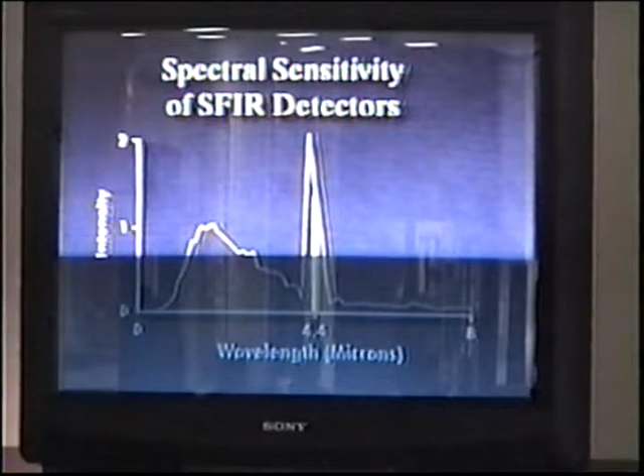Single-frequency IR detectors are useful in many areas where UV detection is not appropriate. They use a patented, narrow bandpass optical filter sensitive to radiation in the 4.4 micron range, an important wavelength for hydrocarbon fire emissions. They also use a flicker frequency to distinguish between hot body radiation and actual fires. Typical response times are around 3 seconds.

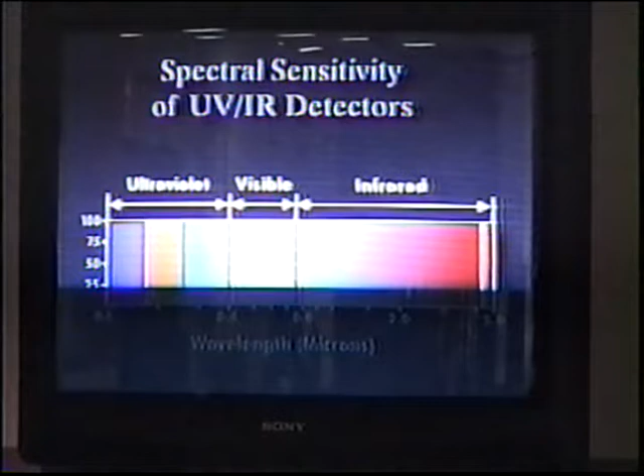UV-IR detectors consist of an ultraviolet and an infrared sensor paired together. The UV-IR detector is very resistant to false alarms because both UV and IR sensors must respond before an alarm is given. While both UV and IR detectors have false alarm sources, they have virtually none in common. Typical response times are between 1 and 5 seconds.

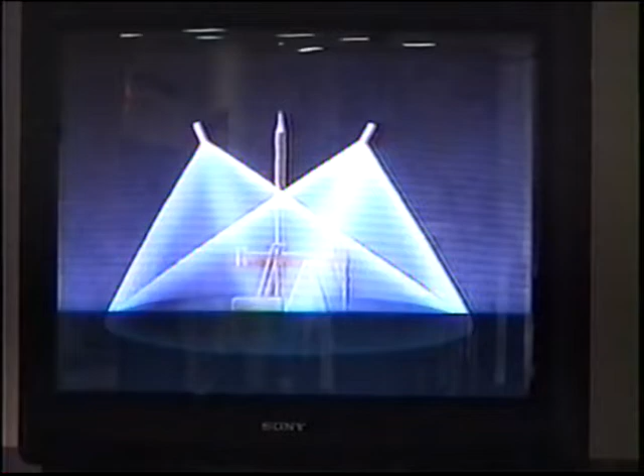All of the detectors have a cone of vision of approximately 90 degrees. Since the detectors will not see fires outside of this cone, careful aiming of them allows a friendly fire, such as a flare stack at a refinery, to be present in the area without triggering an alarm. However, mounting detectors in the corners of a room at 45-degree angles makes it possible to provide thorough coverage of everything in the area.

The first fire test will demonstrate speed of response to a 1 square foot gasoline fire at 40 feet. In applications with very hazardous materials, speed of response can be the most important factor in choosing a flame detector. The UV detector responds fastest because it only requires the fire to reach a certain intensity before sounding an alarm.

Although the vast majority of fires are hydrocarbon fires, some applications have unusual fuels. In those cases, the ability to see non-hydrocarbon fires is important. An example is a hydrogen fire at 40 feet.

The UV detectors saw the hydrogen fire while the others did not. This is because non-hydrocarbon fires, such as hydrogen, ammonia, titanium, and magnesium, do not emit radiation in the 4.4 micron range required by the IR and UV-IR detector.

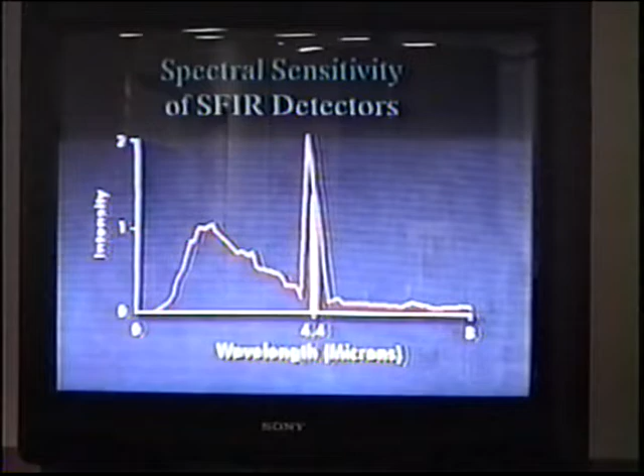The next fire will be a methane plume fire, as defined in standard 3260 by Factory Mutual, observed at 40 feet. All detectors responded well to the fire.

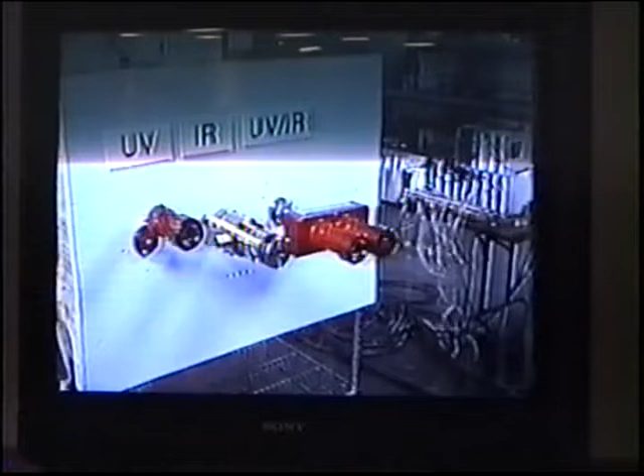Unlike the plume fire, some fires from gas leaks are under high pressure and can be quite large. A major gas company conducted high-pressure gas fire tests on Det-Tronics flame detectors. These tests were representative of risks found in industrial applications. The flames produced in these tests are readily detected by Det-Tronics UV, IR, and UV-IR detectors.

The ability to reject false alarms is an important criteria for a flame detector. A common false alarm source in industrial applications is arc welding, here observed at 40 feet. The UV detector has responded to the arc welding, while the others responded only to the fire.

Arc welding is an intense emitter of UV radiation, but does not emit in the 4.4 micron range. Therefore, the IR and UV-IR detectors do not respond. The ability to ignore arc welding while responding to the fire it can cause is an important capability of Det-Tronics UV-IR and IR detectors. Welding is a high fire risk activity. In America, between 1981 and 1985, welding caused over 3,000 fires each year, causing damage of almost $40 million each year.

Flickering hot body radiation is another common false alarm source. Common sources of this radiation include hot engines, manifolds, or lights, interrupted by moving machinery or people. The single-frequency IR detector has responded to the flickering hot body radiation at a distance of 30 feet. The UV and UV-IR detectors do not, because hot body radiation does not affect UV detectors.

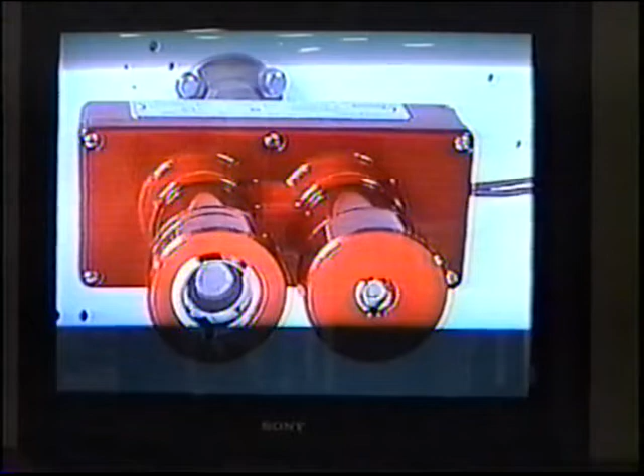The UV-IR detector resists false alarms and has a good detection range. It will see fire even in the presence of welding. Good applications for UV-IR detectors include aircraft hangars, transport loading racks, and compressor stations.

There is no perfect fire detector. Each has strengths and limitations that make them appropriate in some areas and less appropriate in others.

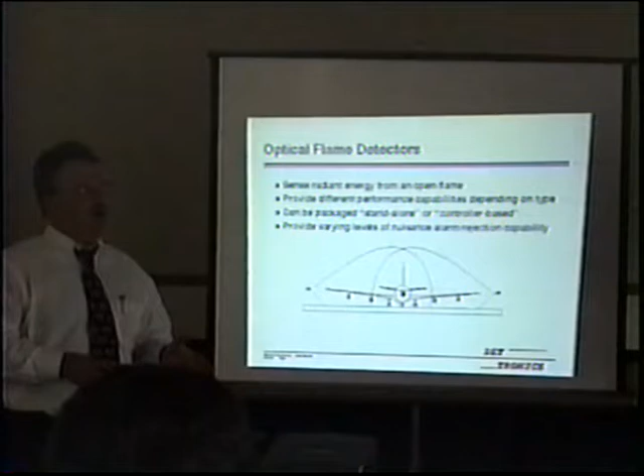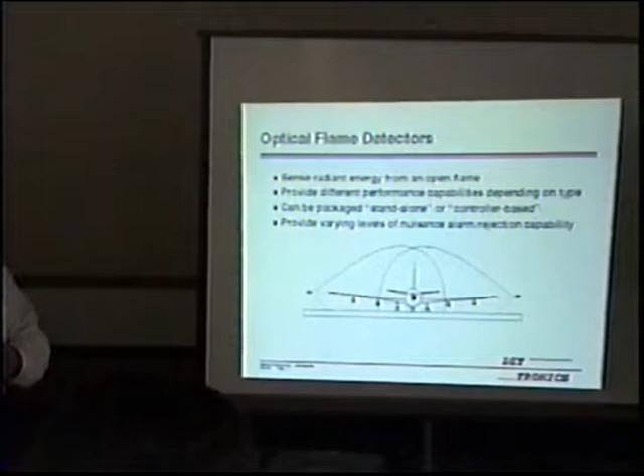When we look at optical flame detectors, we're looking for the visible, ultraviolet, or infrared energy coming from the fire. If the fire was smoldering, we wouldn't be able to see it because it's not giving off the right properties. So we're actually looking for the energy level to be at a required level after the flames have grown from the product.

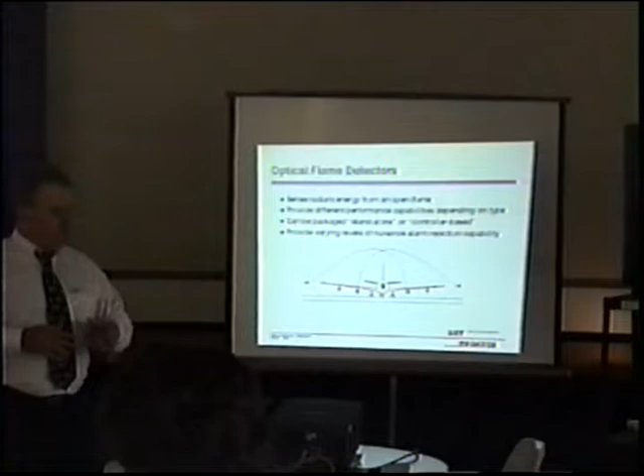If we look at this application here, you're looking at a plane. We have optical flame detectors looking from either side, and they can be looking from the front. We have systems designed to act as one controllable system, or unitized products that can be tied into any existing fire panel, giving you a lot of flexibility.

When we look at a flame detector, one of the key items is the cone of vision—where does the detector actually see, and how do you use that to cover a complete area? A typical cone of vision is 90 degrees, and Factory Mutual tells us that typically, or at minimum, 50% of the central axis is where your cone of vision at 45 degrees off angle is drawn.

We've made some changes recently with the new product, and we could actually push that up to 75% of the detection range, giving you more coverage per detector. This allows you to zone detectors and cover areas where you may be forced to rely on a single detector. We'll be showing detectors today on axis, but the response can be figured at 50% for some, 75% on a single product.

One of the key features in optical flame detectors is that it has to know it can see a fire. Detector Electronics was the innovator of optical integrity—basically an optical check on the detector. This is incorporated in all our detectors.

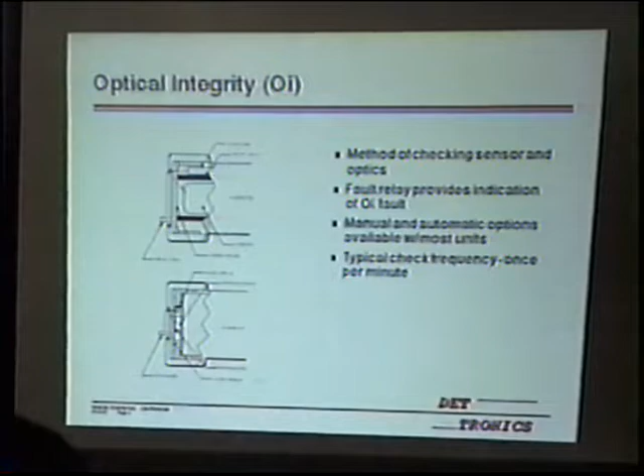We have a UV source that is bounced off a reflector through the window, back through the window to the detector. That verifies that the detector is capable of seeing a fire, or if it's been contaminated and no longer able to see a fire, it'll give you a fault telling you to clean it or service it. This allows you to rely on your detector being in service out there in the outdoor environment.

We have an infrared detector that also incorporates a very similar check, except now we have an infrared source that comes off a reflector back to the sensor. In both these optical check methods, we're looking for the radiation in the wavelength that the detector is looking at—verifying the window's clean, and verifying that the detector is capable of responding to radiation in the proper wavelength. Very reliable.

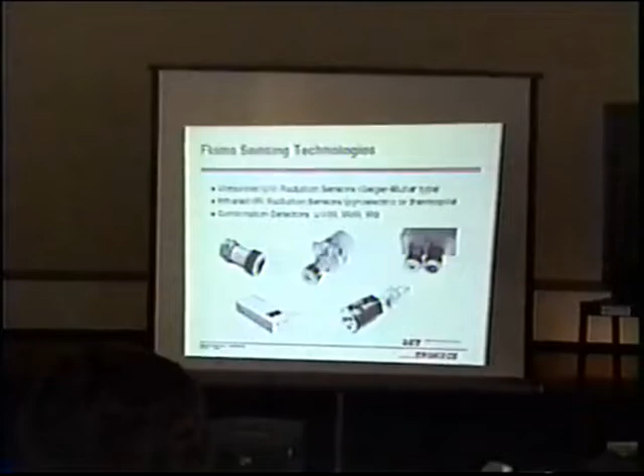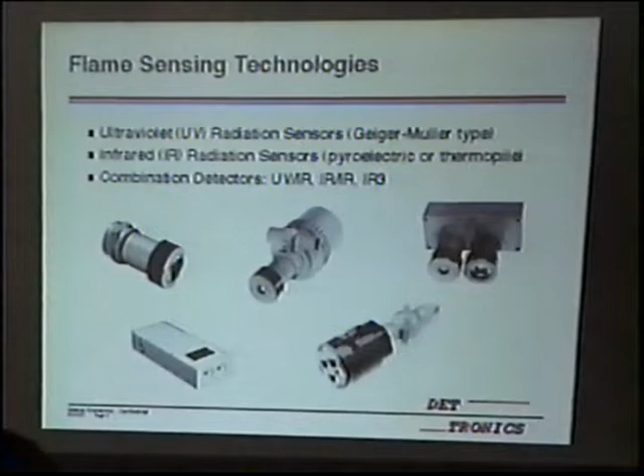We look at the different technologies. We really started with Detector Electronics ultraviolet detectors. They were very good, general duty, but we found there's a lot of areas where there's welding, a lot of areas where there's radiation, people looking at the integrity of pipelines doing a lot of X-ray. And UV detectors are very good at telling you when you're doing that.

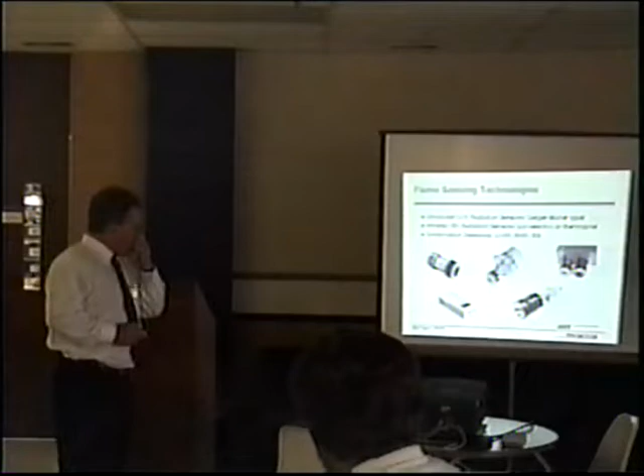So we incorporated an infrared sensor with it, and we also built a single frequency infrared standalone for use in very dirty areas. Since then, we have added a dual spectrum, which is a dual wavelength detector looking at two different wavelengths. And this is our new multi-spectrum IR detector, which gives us an advantage for long range and also high false alarm immunity.

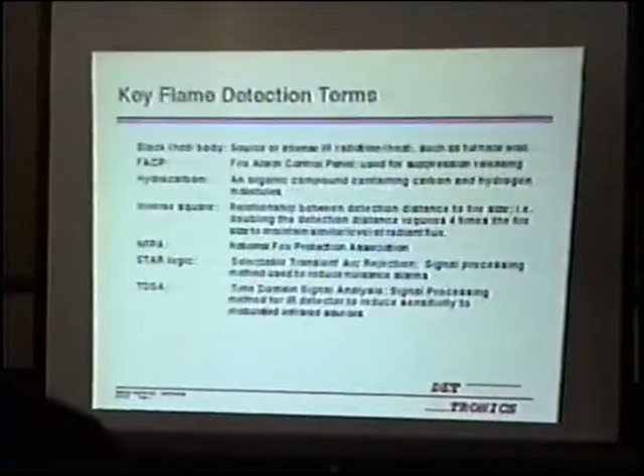We look at just a few concepts we're going to be showing today: the black body, which was the heater you saw in the video, something that is normally in an environment, and we'll see what effect that has on flame detectors.

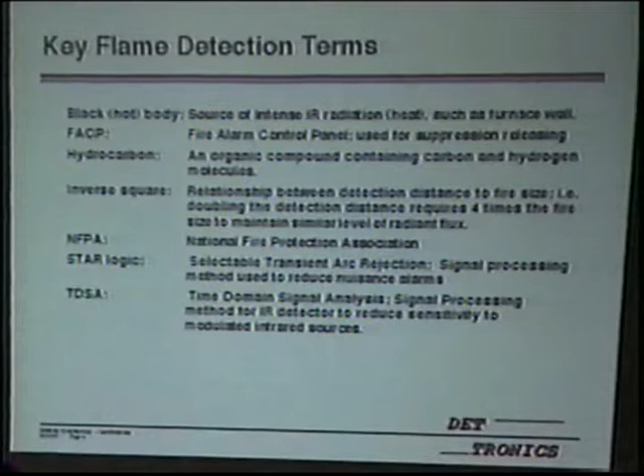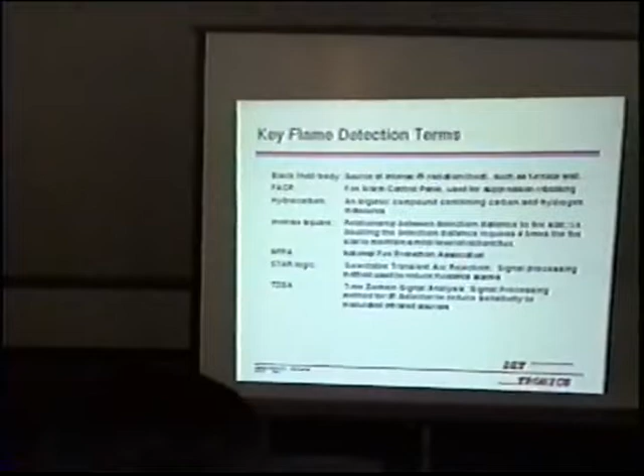The other key item here is that flame detectors are governed by the inverse square law, which basically says to double your distance, you have to have your fire size grow by 4 times. So when you look at the detection range of a product, you have to look at what size fire you can live with and size the detector to the distance to the fire size, so that you don't rely on a 10-foot fire in a 20-foot building. The flame detector is going to be able to see it, but you may not be able to save anything once that happens.

We're going to be showing StarLogic, which is a selectable transient arc rejection, used on our UV and UVIR detectors, and also a patented TDSA, time domain signal analysis. This allows an IR detector to respond to fires very fast, but reject regularly modulated IR, which normally would cause a false alarm in that type of technology.

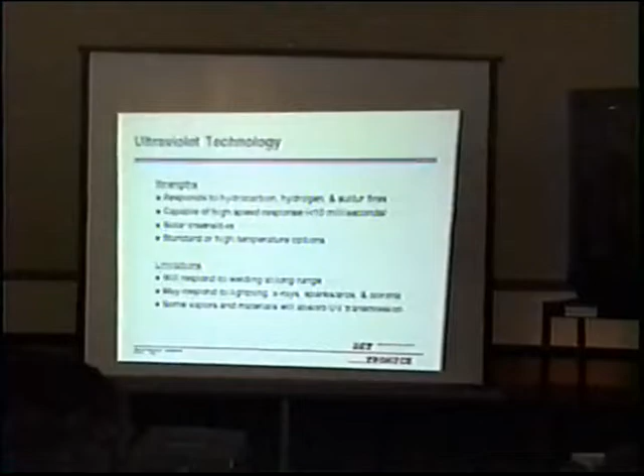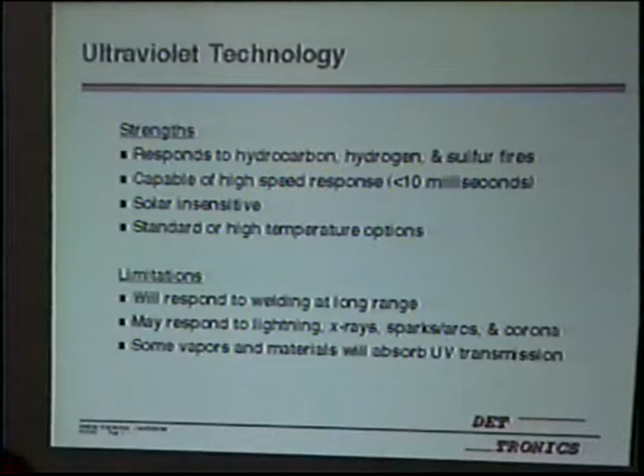We look at the ultraviolet detector. Great, it's general duty - it can basically see every kind of fire you can do. It can be very, very fast. It's solar insensitive. Limitations, as we said, welding is very, very bad. Think of a guy working on a pipe a mile away - if that detector is in that direction, it could detect that welding a mile away, and that could cause a false alarm from a facility where you don't realize they're welding.

The other item is X-raying, and X-raying is hard to control because a lot of people think the wall's going to stop it. We have compressor modules up in Alaska where they're X-raying the pipes, and all the detectors go off inside - can't figure out why. So what we've done is gone with different technologies to handle problems that UV can't overcome.

When we look at single frequency infrared detection, it is very strong because it can run in a very dirty environment. It doesn't need a lot of maintenance. If there's oils present, it's basically invisible for an IR detector.

IR detection is basically blind to arc welding unless you get very, very close. We look at a detection range for someone arc welding at about 15 feet when the detector is set at its highest sensitivity, as compared to a UV detector at a mile or more - it's fairly insensitive to it. We do offer a high-speed version for special applications such as high-pressure gas lines, but there are some limitations with IR.

As we saw in the video, we look at 4.4 as our peak wavelength on IR. Non-carbonaceous or non-hydrocarbon fires cannot be detected by that because they don't exhibit any kind of radiation in that area. So we have to really stick with your petroleum products. It will not be able to detect something like silane. It will not be able to detect hydrogen. So you have to know what you're going to detect and then fit the right detector to it.

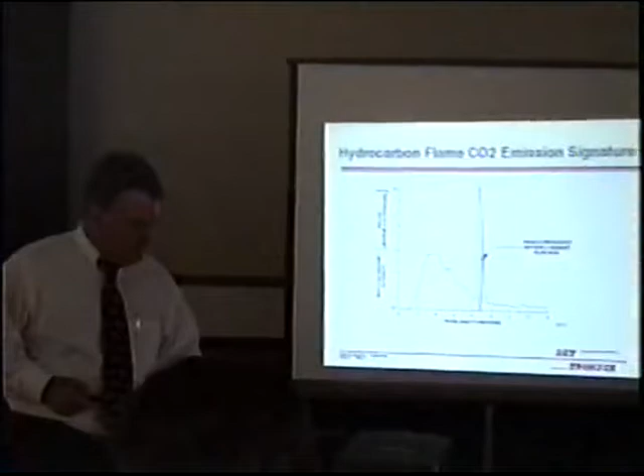We look at the IR, and this is true for the UV IRs and single frequency IRs. We're looking at this very narrow 4.4 band, and this is actually a curve of a fire. A fire will exhibit in the water band about 2.5, and the signal will be absorbed by the environment. We get this other clear window, and we use this little sliver here because of the solar insensitivity for the IR in that range. But it also gives us a lot more area to work with, a lot more signal, allowing us to get very good range and reliable detection.

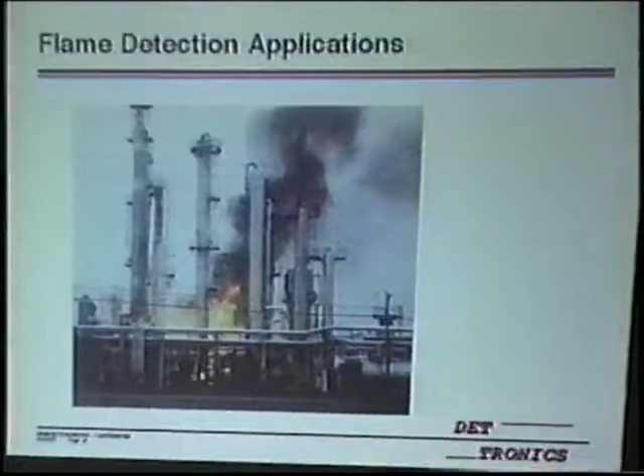When we look at an application here, this is a refinery obviously engulfed in fire. This is what we want to basically stop before it gets that big. Our flame detectors are gauged by what Factory Mutual 3260 tests them to. We look at a 1 square foot gasoline fire or a 30-inch methane plume and other fuel 1 square foot fires as our test fires. And I can tell you there's not a product in the marketplace that can detect fire faster, more reliably, and give you the false alarm immunity that we're going to show you today.

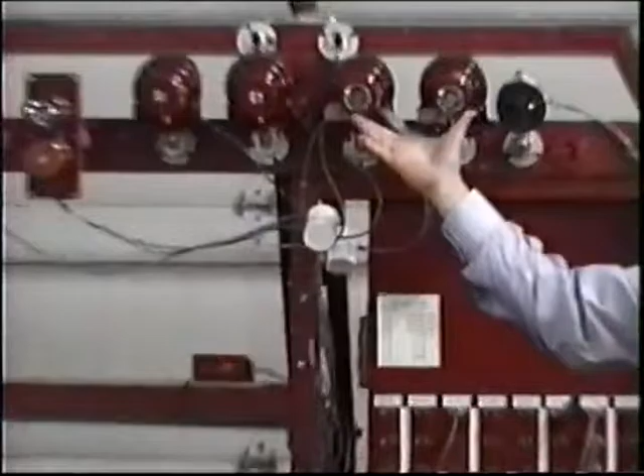We have 2 UV detectors. This happens to be our 7602E. They all have difficult numerical names to remember. The reason there are 2 here is that one incorporates the STAR logic we saw in the video, an advanced signal processing algorithm, and one does not. We'll be able to show you the difference in performance that allows us to achieve with both detectors here.

Here we have the U7698E, a single wavelength infrared detector. These have but one IR detector per device, looking at the 4.4 micron region we showed in the presentation earlier. Again, there are 2, because we're going to show the difference between the standard signal processing algorithm, which looks for the occurrence of flicker and level of intensity, and the TDSA, time domain signal analysis program, which allows us greater signal processing and greater distinctions between fire and non-fire sources of infrared radiation.

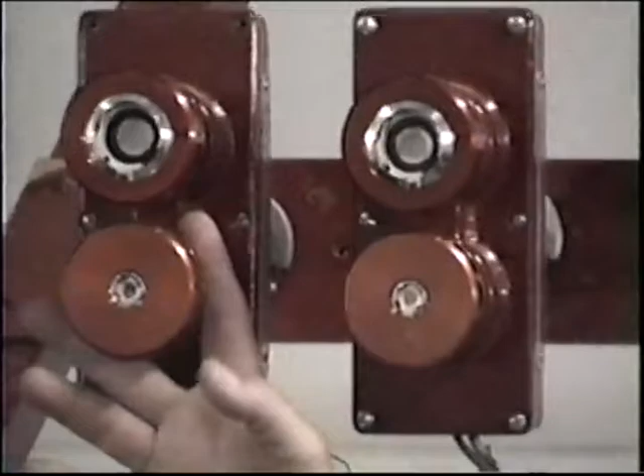Last but by no means least, we have 2 samples of our UV-IR detectors. This happens to be a unitized device, the 7652, whereas this is a controller-based device. The reason there are 2 of these devices here is primarily so I can demonstrate the ability of the detectors with controller-based connections.

I can take and look at the individual signal strengths in the IR and UV detectors, and that will allow us to compare the UV and IR outputs of various fuels. Because another thing we'll see tonight is that a fire is not just a fire - just as it makes a difference in how you site sprinklers, the fire hazard itself also makes a difference in what kind of performance you can expect from your optical flame detectors.

So that's the cast of characters. The whole thing is, as you saw in the video, connected up to our data acquisition system, which is operated by Jeff. Each device is monitored by the data acquisition system, and the alarm relay is polled every tenth of a second. We can go faster than that, but tonight's demonstration will be looking at every tenth of a second.

We also have the detector down at the far end of the building, right next to the fire pan, that we call our time zero detector. That provides us with an automatic means of determining the point of ignition. We've got that set at a very high sensitivity level, and being right up against the fire, it produces a response time of about 50 milliseconds, giving us an automatic indication of the point of ignition. We can wander over here and take a better look at how this all works.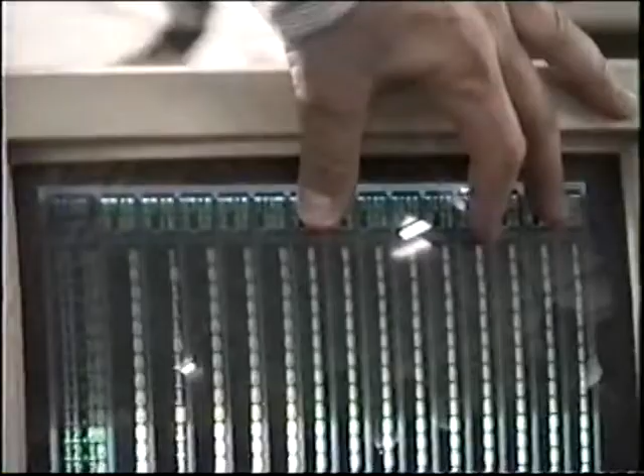As you can see, the acquisition system runs on an independent time base, scrolling by, and our sample time is every tenth of a second. The green characters here are hash marks - each column is the detection system in question.

And when that goes from a hash mark to a dot - Jeff, can you give time zero some radiation there and demonstrate that - that indicates an alarm. Notice over here we start to see numbers popping up in the yellow column, and that's the count per second.

The UV and IR detectors that we're monitoring the individual signal strengths from produce a frequency output proportional to the intensity of the radiation being received, and that is in a unit we call counts per second. So it's a number of pulses received in a unit amount of time, and that gives us an indication of the amount of signal strength we have either in the UV or the IR bands.

So when we do a response time determination, the point at which the time zero detector trips is compared to the point at which each of the detectors under test indicate their alarm, and the net difference is then the response time. We also have the ability to go in and take a look at the signal level at any point in time in the UV and IR bands.

You'll notice that our IR detector produces a constant level of output that's used to verify on a routine basis - it's an electronic zero, and the presence of that indicates to the controller that the detector is in fact there. Of course, it does not accomplish the through-the-lens check that the OI system does. It's kind of a belt and suspenders approach there.

Yep, I'm about ready to get to that. Because not everybody can watch that, we have every system under test today on the annunciation panel board. You'll see them labeled by model type and also by technology. So going from the left side top, you've got the 7409 UVIR, that's that controller-based system I showed you.

UV system without star, next down the UV system with star logic. The 7698E single wavelength infrared detector operating without TDSA. The single wavelength IR detector operating with TDSA. Moving into the next column, we have the U7652 UVIR detector. It's the unitized package, the X3300 multi-wavelength IR detector.

And last but not least, the PM6M dual wavelength detector. To the left of each one of those detector blocks is a red light that will come on indicating when the system is in alarm.

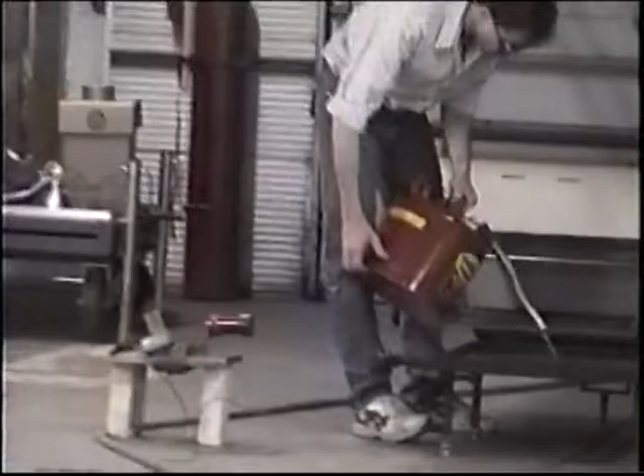Have the detection systems positioned at a distance of approximately 100 feet from the fire. This is a size of fire, type of fire, and range that all the detection systems in question should be able to react to. I thought that would be a good place to start.

Everybody ready? Stand, please.

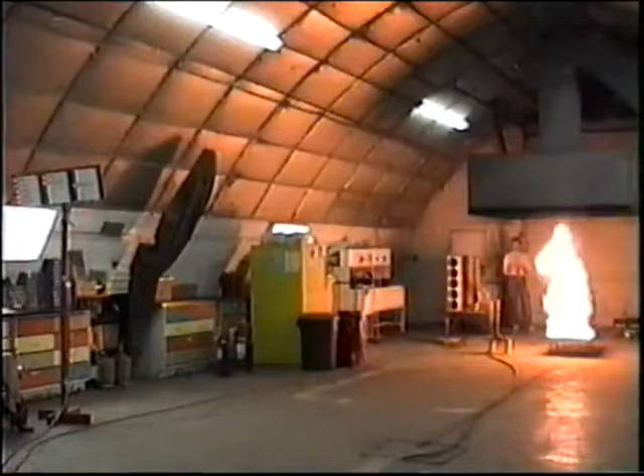Power of that fire - you can actually feel the radiant energy on your face. Quite an intense fire, and I will ask Jeff to put it out before it gets carried away with itself. Do not try this at home.

Board lit up like a Christmas tree here. It does do that. We'll get to individual response times here.

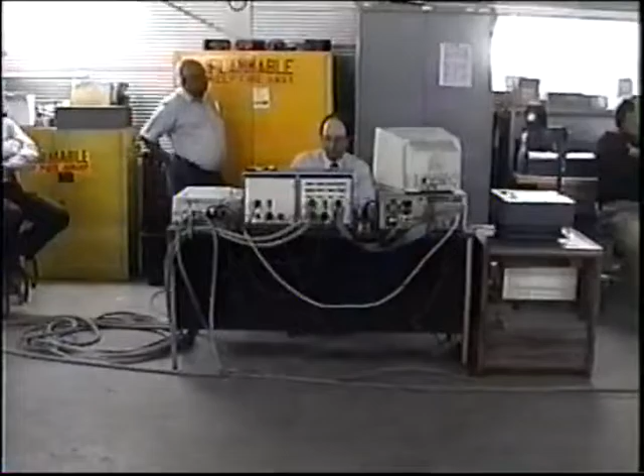Well, that 2 foot by 2 foot fire would be a typical hangar fire size that they would typically test for at 100 feet. When you go out to 150 feet, their test fires have been up to 10 by 10, or 100 square feet - very huge fires that Rob got to have fun with.

We could do that fire here, that's just regular gas. But we have the ability - all those detectors are actually set for 3 by 3, so much smaller fire than is actually specified for, and that gives us the reliability. You know you're going to be able to detect it when you need it.

Okay, bright light warning to those of you standing close. This is pretty typical of what you might see here from the detectors in question. You see that we had alarms ranging anywhere from under a second to just over 10 seconds.

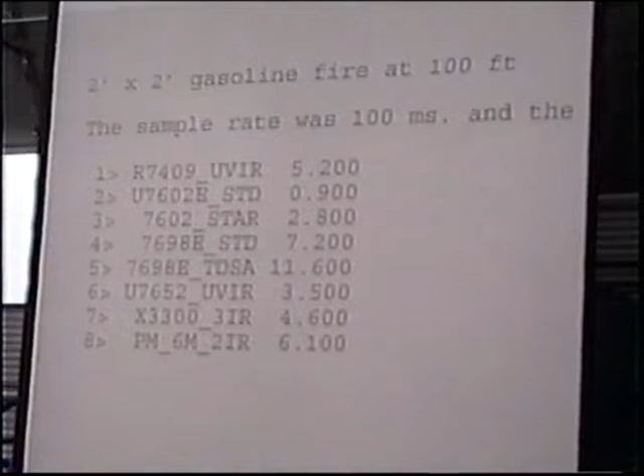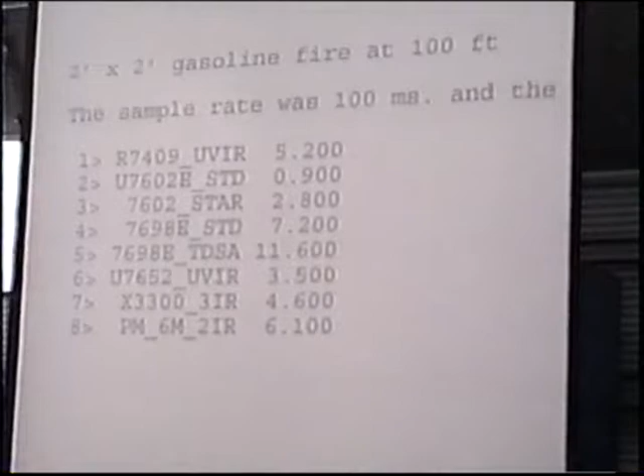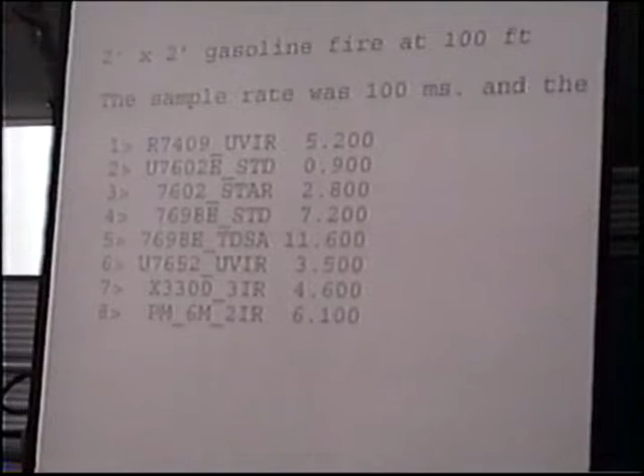Our UVIR system operated in 5.2 seconds. UV systems, depending on their sensitivity level and whether they use the star logic or not, 0.9 to 2.8 seconds. The single wavelength IR, 7.2 to 11.6 seconds. Again, this unitized UVIR went in 3.5 seconds, the X3300 in 4.6 seconds, and the PM6M in 6.1 seconds.

You might wonder why some of these detection systems took as long as they did to react, and it has to do with the fact that this is their rated maximum detection distance. Also, even though to our eye it appears that this fire develops virtually instantaneously, it actually takes a certain amount of time for the fire to come to an equilibrium condition and reach its peak size.

And I can illustrate that by taking a look at the count per second data that we get from the fire. To do that, I have to go back into the data file, determine when the start of the fire was, and I'll take a look at the first 5 seconds and then 10 seconds later.

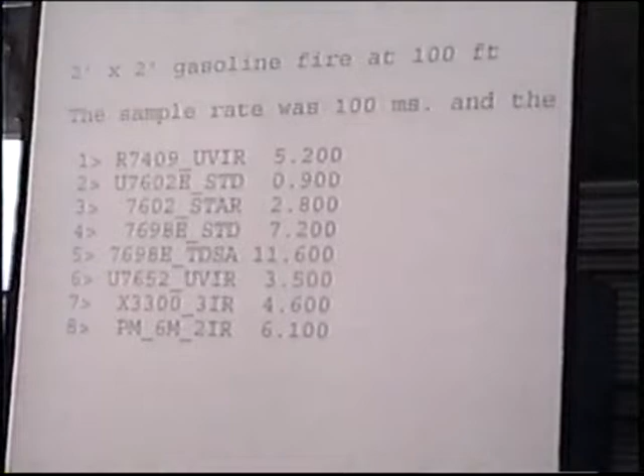Keystrokes, Rob. Well, you know, sometimes there's an operator error from time to time. I won't try to hide that.

Okay, so here's the UV and IR outputs we're monitoring from the detectors in that first 5 seconds of the fire. And while that's coming up, I'll prepare...

Sample, seconds later. So our next fire is going to be a 1x1 gasoline at the same range. You'll see a difference in response.

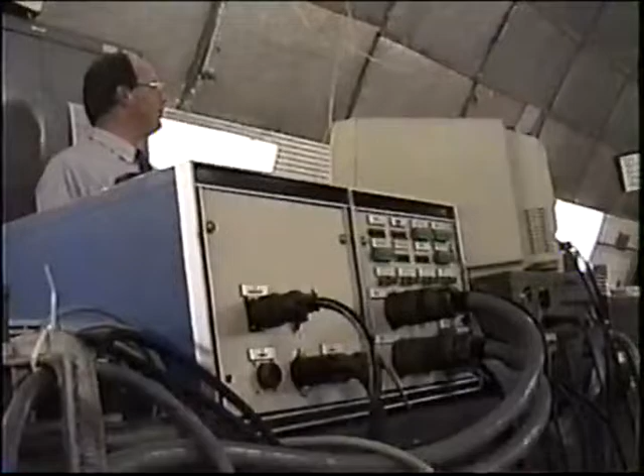We'll refer back to these test results now that we're going to go to a fire that's 4 times smaller, a 1-square foot gasoline fire. Each time we burn a gasoline fire, it's important to recognize that gasoline is not a pure compound - it's a mixture of compounds, some quite volatile, some less volatile. We start with new fuel each time because, again, what's the actual hazard - isn't it going to be fresh gasoline, or heated gasoline? You can play games with this, but it's important to be aware of the issues so you're not fooled into thinking performance is what it may not actually be.

We'll do the test the very same way, and I believe everybody's ready.

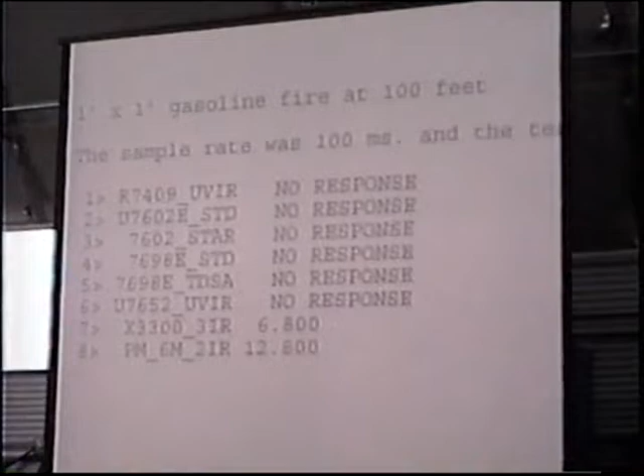The 6M and the X3300 are the only detectors rated to see this fire at this distance. Even though it may be obvious, there can be confusion - people may think that because a detector didn't see this fire, the 7602E, for example, can't see a gasoline fire. That's not really true. It either has to be bigger or you have to be closer. There was not enough signal level - the criteria was not met in order to generate an alarm.

Let's just compare here, we'll put it up here. These are hard to read when you've just got transparencies. Now here is the count per second output level of the UV and IR detectors, and a lot lower, especially in the UV detector area. You can see basically pretty close to zero.

That was compared to our 25 counts per second that we had before. Notice that in that first burst of ignition, the IR detector did get some output, but again, it was not anywhere near adequate to generate an alarm. Even if it had been, its UV partner was not up to its output level, which is expected as a typical 25 counts per second - a very typical field setting.

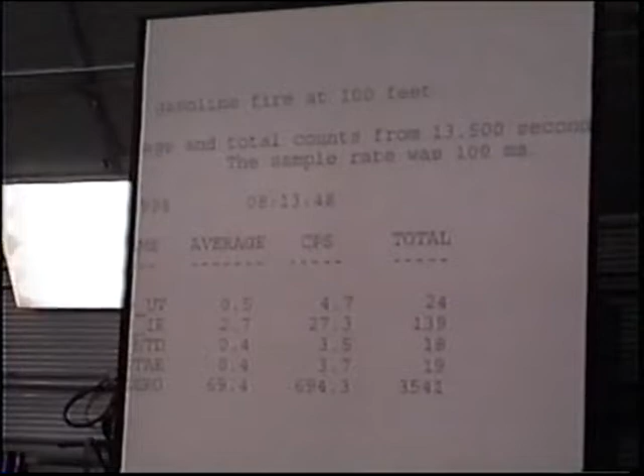As we saw before, there is some increase over time with this fire, but not as much. That can be understood in terms of the fact that there's not as much fuel to heat, and a smaller fire tends to reach equilibrium faster than a larger fire of the same fuel type.

One other thing to notice here is what we call the saturation output level of the UV detector. The UV detector can't really put out much more than 800 to 1,000 counts per second, regardless of the intensity of the UV radiation it's receiving. You'll notice the time zero detector is operating quite near that, being only about a foot from the fire.

If at any point there's any questions or any additional interest, please stop me, interrupt me. This is, I've seen this before, so.

Hey, Rob? Yeah. With the gasoline here now, do you test with different types? Like if you use unleaded versus aviation fuel, and do you see a difference with your detectors?

We do indeed. In fact, when leaded gasoline became virtually unavailable some years ago and unleaded became the standard, we had to do a little research as to whether or not there was a difference, and there was a slight difference. That meant we had to reestablish control limits and so forth for our production tests.

It caused us a little bit of grief, but you might notice all the flammable storage lockers around here - it's virtually a cocktail cabinet full of different flammable liquids and materials, because each flammable material, even though they may be of a similar category, will have its own characteristics.

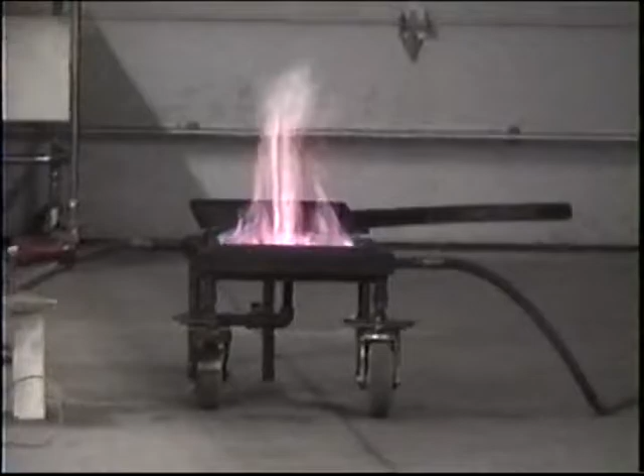This would be a fire typical of, say, an oil platform where they use methanol as a drying agent, or in other processes where they use methanol as a washing agent.

So this came in as you said, at maximum rate of rise. We'll just let this sit here. You can see it never really gets any greater than this, and this is what I would call an equilibrium point.

When you look at this type of fire, the methanol fire, you'll notice, like the PM6, this is out of range of that product, and it will not detect this no matter how long you wait. The fire would have to be bigger. You can't think of it as just a time limit where you can wait longer. If that fire is never going to get any bigger, the detector will never see it.

Well, I think we've waited long enough to illustrate that point.

A question came up: how come the PM6 isn't detecting this fire? This type of fire, when it's detected at 1 foot by 1 foot at 50 feet, is out of range. Yes, it's beyond its detection range for this particular hazard because it's not the same kind of fire. We'll give you some quantitative data here momentarily.

So we look at different applications, there's different fuels. This makes it very hard when you talk about a solvent storage area—you may have a mixture of all these different fuels, and you need to select which is going to be the hardest to detect, and base your design off of that lower burning, lower volatile fuel as your hardest to detect, causing your detectors to move in accordingly.

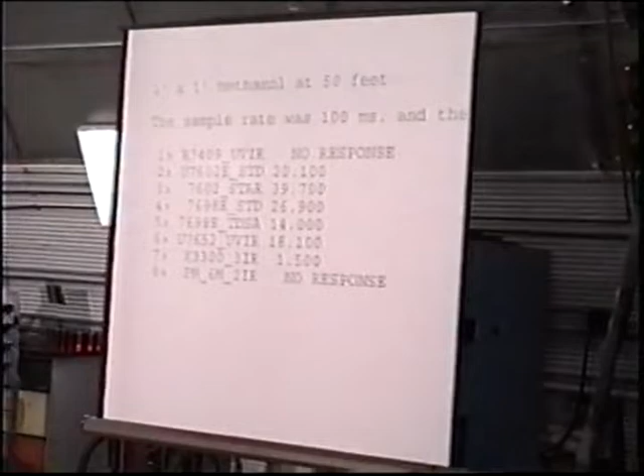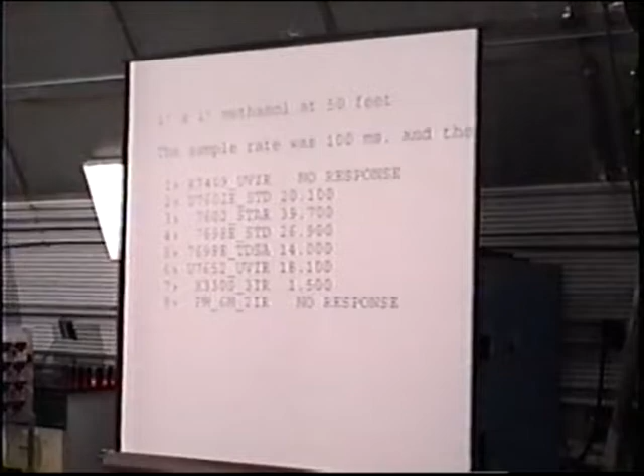Notice the X3300 first to respond—of course, being a very sensitive device, one can expect that. Our UVIRs and the single wavelength IR detectors are right just beyond their sensitivity, beyond their detection range, the sensitivity levels that we have them set, or in the case of the fixed sensitivity devices. So what I'm trying to say is it's not that they can't respond to this methanol fire, but they need to be another 10 feet closer, and they would work just fine.

I talked earlier about how we use the count per second data to look at the differences in fuels. We've talked a little bit about that already. I've taken 2 snapshots of the output here.

In the first 5 seconds of the fire, very little UV, pretty low levels of IR. A few seconds later, the UV has grown a little bit, but not really to the alarm point yet. And if I go to the very end of the fire, finally we did get some alarms in the UV, somewhere in the 25-second range.

Let's just compare the methanol data to that of the gasoline data. We won't be able to compare absolutes until we run the gasoline at this distance, I guess. So that will be next, right? Gasoline next? Getting ahead of myself.

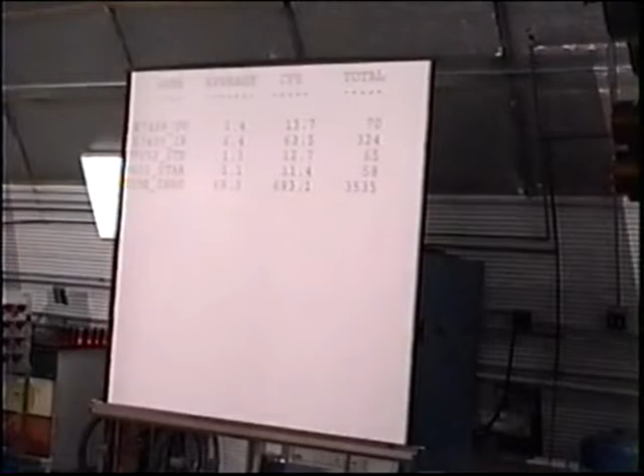Okay, now just to compare apples to apples, here's gasoline—first 5 seconds of the fire. I should have looked for the first 5 seconds. There's methanol at the equilibrium point. There's gasoline at the equilibrium point.

So the top one is gasoline, the bottom one is methanol. The point you can see qualitatively with your own eyes is that there seems to be a lot more radiant energy coming off that gasoline fire, the block of data at the top, than off the methanol fire, block of data at the bottom. And again, that's absolutely true. Notice the proportion of UV to IR energy is really not that terribly different. They both have similar amounts.

We noticed that the UV detection with the star logic, which requires a steady level of output at that 25 counts per second range, took a long time to alarm, and one can now understand why, because even averaged over a long period of time it was only about 20 counts per second. In fact, there must have been a momentary surge in the UV, as we saw the flickering. We talked about the oscillation that occurs around the peak output level once equilibrium is reached, and that did allow it to be triggered.

So this kind of data allows us to tell the customer, for example, they may say, well, I want to see a square foot of gasoline, but I can't get the detectors any closer than 50 feet away. What can I do about that? Well, we have a couple of choices for you. We know we can switch technologies, the X3300, PM6M, or we could run at a higher level of sensitivity. We know what the trade-offs are there. If those trade-offs are acceptable, we'd be able to provide not only qualitative advice, but quantitative advice.

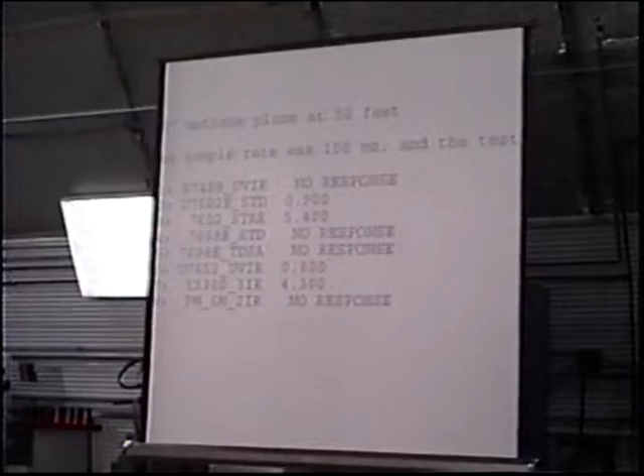In this particular case here, we see just what we'd expect. Most of the systems are beyond their sensitivity limit for this size fire at this distance. But we have a response from the X3300 in 4.3 seconds. As you've seen with this device, it really never responds any quicker than 3 seconds, and that's inherent to its signal processing algorithm. It does a lot of advanced calculations to distinguish fires from non-fire sources of radiation, requiring a sample of data in duration of about 3 to 6 seconds to make that determination. So it's inherently a slower responding device, but that's usually acceptable in situations where a high level of false alarm rejection is required.

The unitized UV/IR didn't manage to respond until 0.8 seconds—you might have noticed it was kind of toggling in and out. The only other detector that gave us a good, solid response was the UV detector. And again, we see that there was some difference between the star logic and the standard version of the device.

The reason for that is just right at that point where we're just below the alarm threshold, so we're waiting for an occasional excursion in a higher intensity direction to get the UV detector to indicate alarm at this distance.

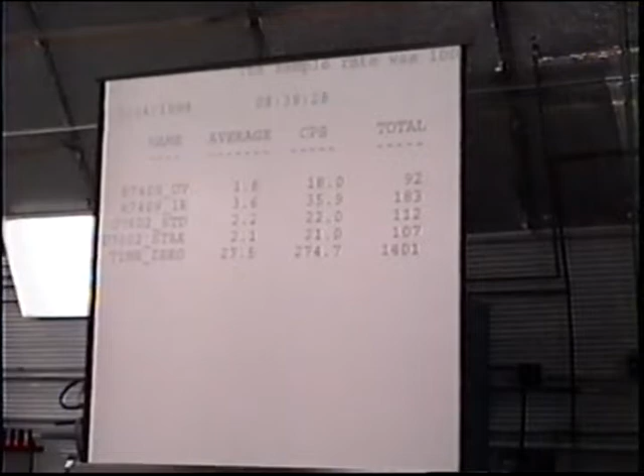Notice here that in contrast to the other two fires we've looked at, we have almost equal amounts of UV and IR. That's just a property of this type of fire versus the other two, and it's important to know that to make the best application of the technologies to the hazard in question.

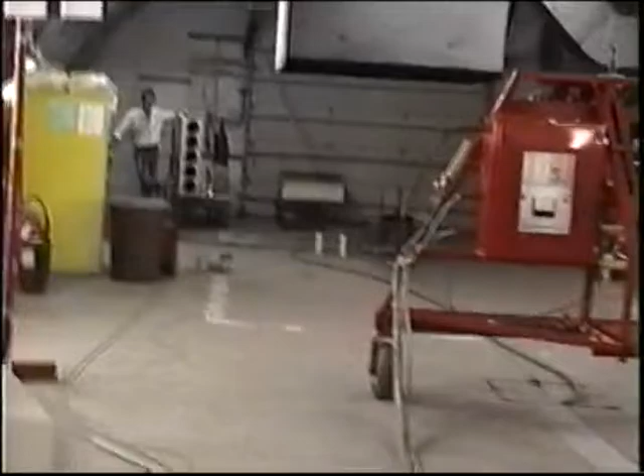Now we move in a little closer to where we'd expect all the systems to alarm. This will also be the distance at which we look at some false alarm sources, which minimizes the amount of moving around we have to do. I'm ready if you guys are.

We're actually still out of range, at 25 feet, with a PM6. That's long range to heavy fuels, but very short range for light fuels. Okay.

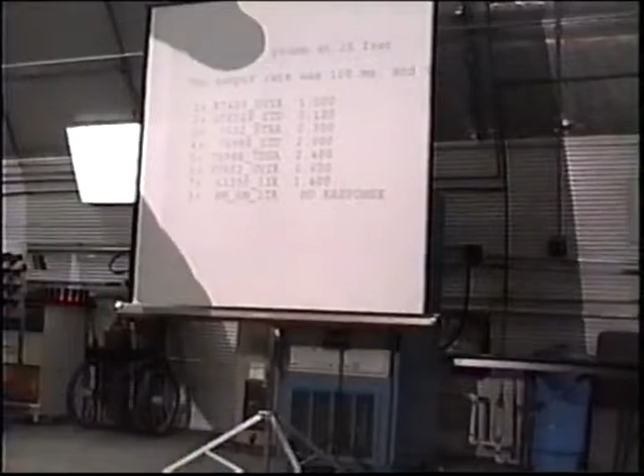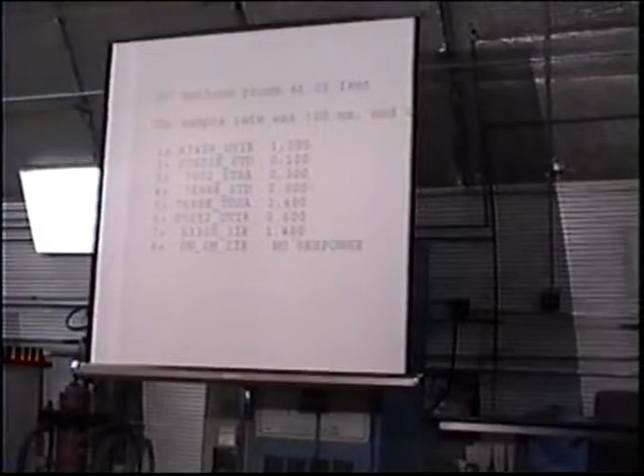Again, to illustrate the point that this particular detector won't detect a given fire - it all depends on how close, how big a fire. Here we see everything responding in very short order, and my X3300 just made a liar out of me. As it gets more intense information, it's able to make a decision without quite so much calculating procrastination. So this is an exception.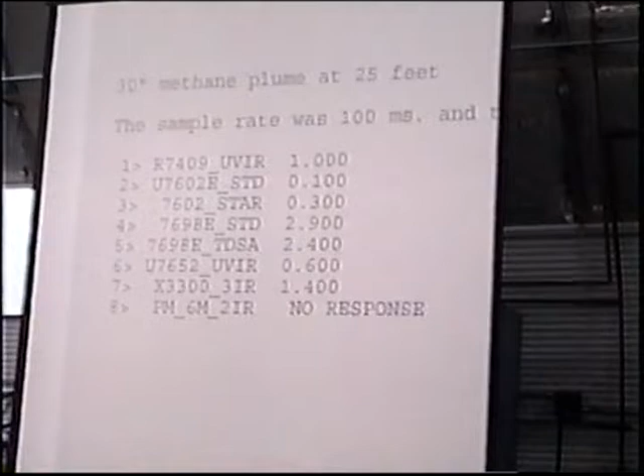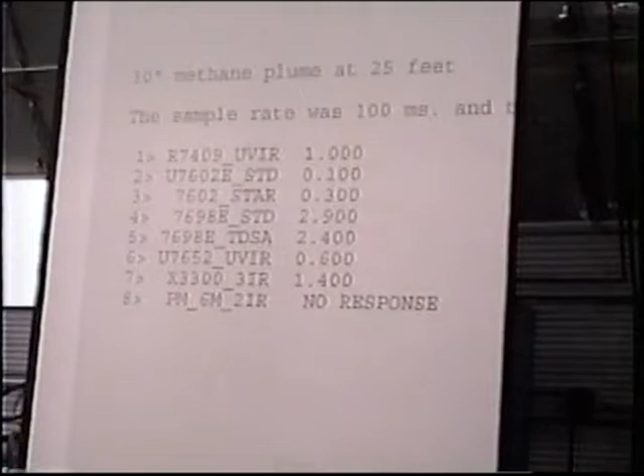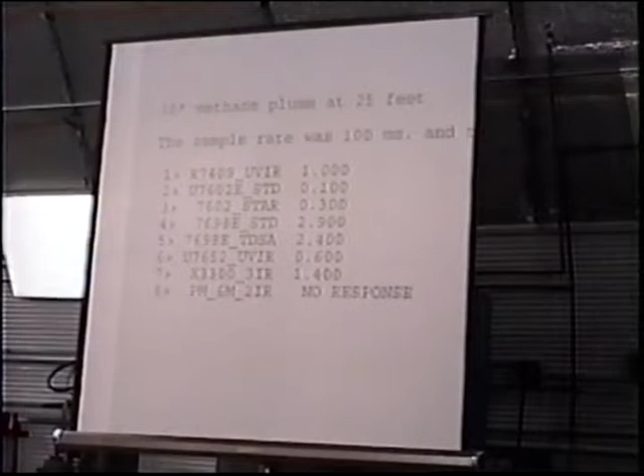At 25 feet, we're at a quarter of the detection of this device to this hazard, which means we've basically got the inverse square law. That would mean we have 16 times the amount of radiation that we need for this detector to alarm. So when you go over 10 to 1 in terms of the amount of radiation you need, you can expect the detector to do a little better, and everything else is reacting in the amount of time typical to the minimum.

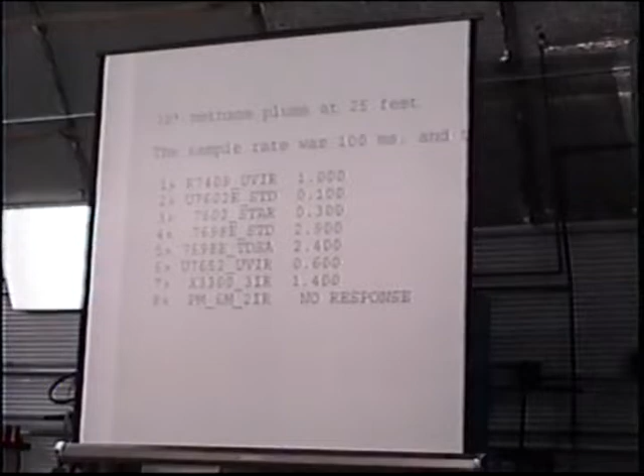The 7698E is again a device that at standard settings for TDSA is a 2.5, 3, 4 second type of response time. So again, this is something we would consider as best case.

We look at the... I must have run out of overheads. Well, you'll have to take my word on this.

The UV and IR output level here - now we have on the UV side about 90 counts per second, and on the IR side 40 counts per second. So as you can see, we've maintained about the same proportions of UV to IR, and again that's just something one needs to know to correctly and optimally apply the technology to the hazard in question.

So you can see all the detectors detect all the fires at a given size or some distance. So how does one make a selection for the right detector for the job? Oftentimes it boils down to the interferences that might be present.

I'm making an interference for you right now - a 6 kilowatt radiant heater that's warming up over in the corner behind that rather strange looking apparatus. Now there's infrared present right now. I can run the acquisition system - I don't see any infrared output. The reason for that is there's no flicker. It's a steady source of infrared radiation.

As we said before, black box - is that what you would call black box or not? Black body type of radiation, gray body, black body, hot body - all roughly synonymous. This would be what you'd normally see in a turbine enclosure, or you may see this in a compressor module, plastic extruders, polypropylene extrusion, plastic molding. It can even be in hangars where they're doing metal treating with heat blankets and people working on it. Heat is used a lot more than you'd think in applications, or byproducts heating up in pipes to look the same. A lot of different industrial processes are hot enough to produce radiant heat.

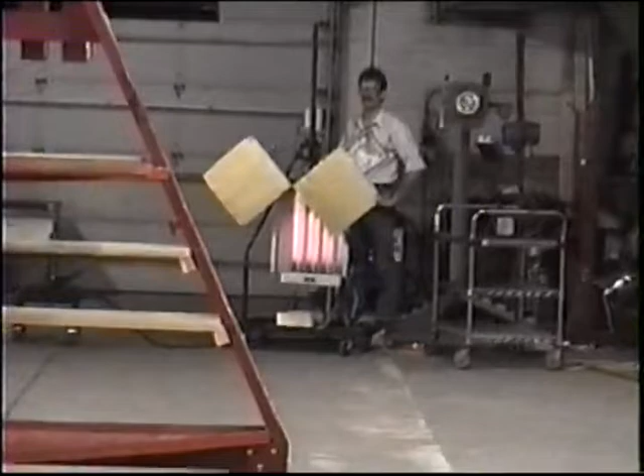But you can see that this radiant heat poses no threat, and the reason is there's no flicker. We talked about the IR detectors needing a level of intensity, which, believe me, we have - we'll see shortly - and the presence of flicker. We can add flicker to that source, Jeff, if we do that.

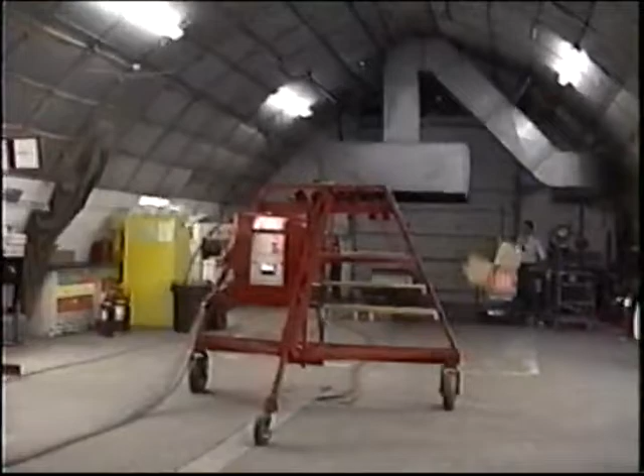See, we have the U7698E without TDSA and alarm, and just to give you an idea of the level of intensity, I'm getting about 100 counts per second from that particular source, which is roughly twice what that methane fire produced at the same distance. So in terms of the intensity of the fire, that's a very intense source, even though its radiant energy is not concentrated in the 4.4 micron band - it's spread over a large region of the IR. It's an intense enough source that even at that little slice of the 4.4 micron band we're looking at, it's actually more intense than the methane fire we previously looked at.

Notice how the UV IR detectors don't respond. The IR detector half is getting plenty of IR, but there's no UV present. And most significantly, the X3300 and the PM6M, which use multiple wavelengths in the IR region, are able to distinguish the fact that that's a broadband IR emitter, a black body hot object IR emitter, and not a fire.

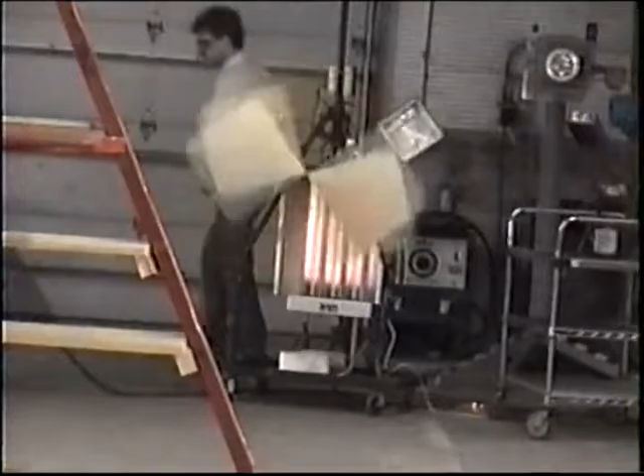Before we shut that thing off, I think we better show one other thing. When you think about this, the detector doesn't false alarm to this source, and that's good. You don't want false alarms. But we have to remember it needs to retain its capability to generate an alarm to the fire even when this source is present. It's quite easy to make a detector that won't false alarm to a given source. It's more difficult to make a detector that can retain its ability to respond to fire even while rejecting a non-fire source. After all, if you have a detector that's simply resistant to false alarms but gives up its ability to respond to fire, you've done nothing more than going over and turning the bypass switch. I like to call that strategy of detection systems auto bypass. Not really what we're after, I don't think.

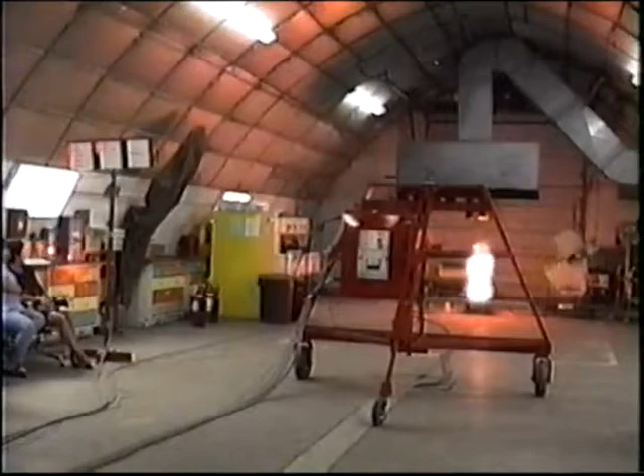So we could have the fan, and we'll do the gas and fire alarm with this. You might notice we have to think a little harder about this. But the 7698 PDSA generates an alarm.

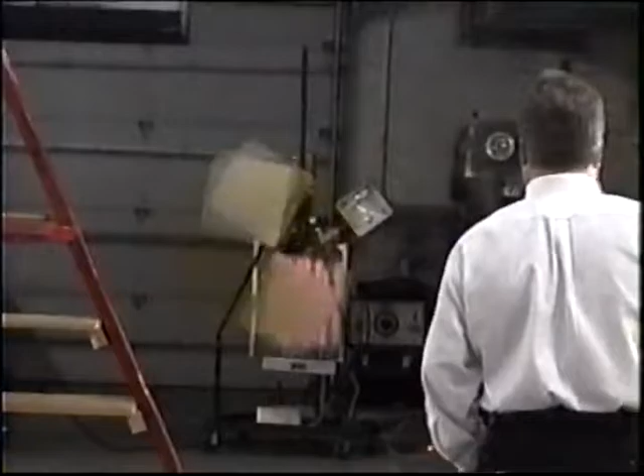Before we turn that off, why don't we just show what happens if you get a mixture of IR and UV radiation. It can happen. This is where the multi-spectrum IR detector has an advantage.

Move your hands at it. Don't hurt yourself. Oh good, Jeff's close enough where you can't get it. Okay, so give us a nice steady blast. This is a high intensity UV source.

This would be like someone arc welding. Again, it's in that hangar application. Imagine they're using heat treating blankets to preheat the structure they're going to weld, and another part of the plane they're welding. So even though there's not a single source of UV and IR, there are concurrent sources of UV and IR possible. And that, of course, defeats the UV/IR strategy, but it does nothing to the multi-wavelength detector.

Okay, now look at the start. This is the response time of the detectors with the concurrent black body and the square foot gasoline fire. Notice that it did take a little longer to make a computation to sort out and separate the signal from the fire versus the signal from the hot object. But both the X3300 and the 7698E with PDSA alarmed. In this particular test, the PM6M didn't alarm. Had that hot object been a little less intense, the result would have been different. Again, this is something that's not absolute, but a matter of degree.

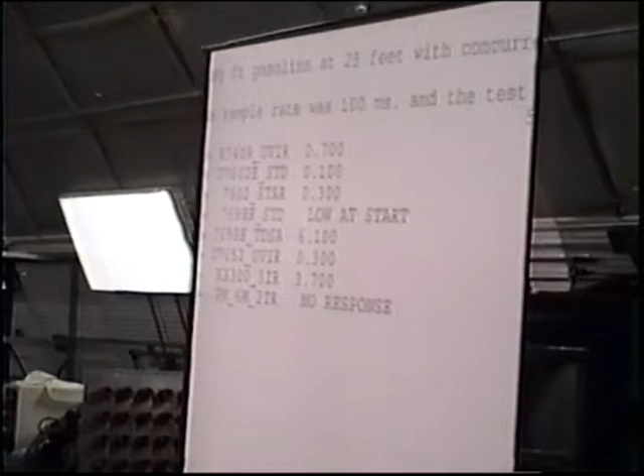It's akin to trying to see a firefly against the sun at some point. The level of IR from this gasoline fire at this distance is roughly about equal to that of the heater, which is getting the same amount of IR off as the gasoline fire. This is a pretty aggressive situation, but one that I wanted to use to demonstrate how good the X3300 is at responding to a fire threat, even though it's actively rejecting a very, very intense non-fire source.

Now we've got the UV arc fired up here. I'd like to demonstrate to you the utility of our star logic. Don't let Buff near that switch. I used to just plug it into the wall and go.

Not UL rated. Okay, we'll start with a nice steady blast of the UV, and I'll take an acquisition picture of it so we can look at the intensity level. It doesn't look like very much. You would see arcs like that, say, in an electrostatic painting application where the grounding hooks start to follow the paint, and you start seeing arcs like that as that grounding is lost.

You can get a little closer. That's actually a neon sign transformer. It's a nice purple arc.

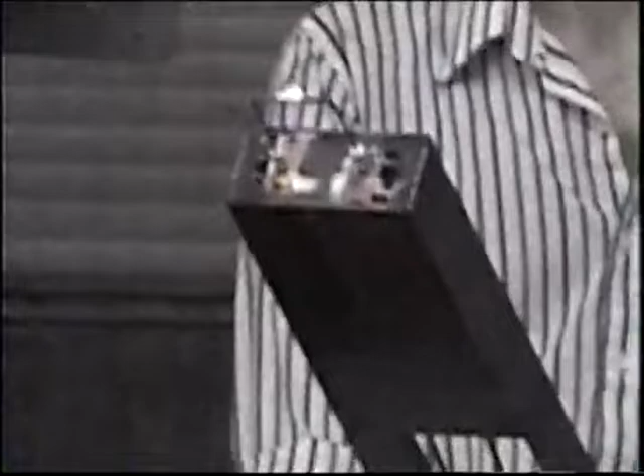That's off either UV, yeah, we talked earlier about line of sight and that kind of thing. Well, one exception to line of sight is the way UV can scatter. You might be familiar from your elementary science days about how the scattering of UV in the upper atmosphere is what makes the sky blue. What scattering means is that the UV radiation, as it hits the different air molecules, kind of bounces around a little bit. Much like if you've ever seen a street light in a snowstorm, you see how the whole snowy sky is lit up around that street light. Same thing happens with UV detection. There's a lot of scattering off the molecules of air that we have, much like you get scattered off those flakes of snow regularly.